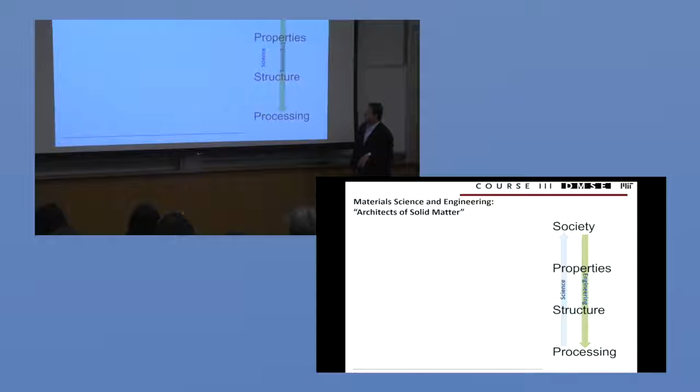All right, so material science and engineering is essentially everything that you just told me is exactly true. What we study in material science and engineering is how to build solid matter.

So here's the way I like to think about it. You all know what a mechanical engineer is, right? And if you think about what a mechanical engineer does, they take components like gears, sprockets, bolts, and they put those things together in novel ways and they make engineering products, right? They make engines and they make mechanical devices. You probably know what an electrical engineer is. They do the same thing. They take component pieces, resistors and transistors and inductors, and they put them together and they make electronics and electrical stuff. You can do this with every engineering discipline, and you kind of know what they are. You take components and you build stuff out of them.

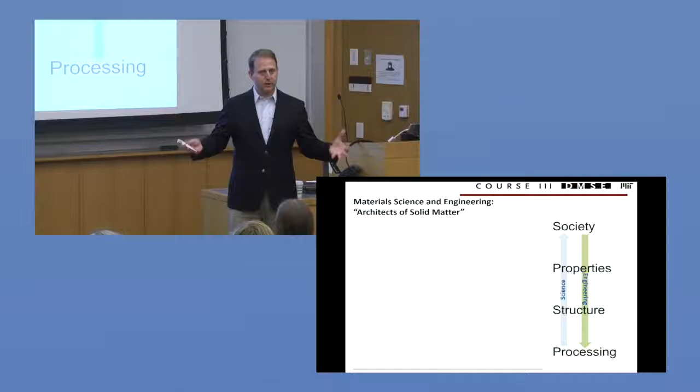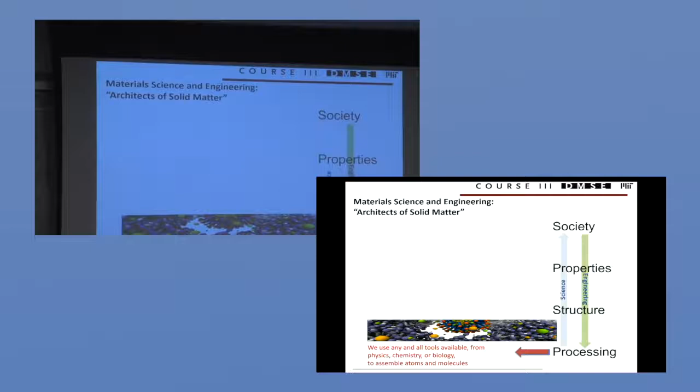Well, in material science and engineering, like I said, we are builders. We're building solid matter. And so when I say that we build, what are my components that I build out of? The answer is that the components are atoms and molecules. So in my field, we take atoms and molecules and we try to figure out the rules for how to put those guys together in unique and interesting ways in order to build solids. Now, there's an instant corollary of that.

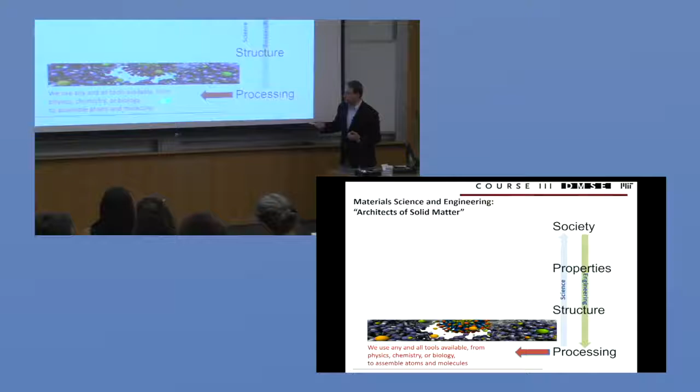How do you push around atoms and molecules? How do you build out of those? You don't pick them up and put them together. You have to really understand basic science, physics, chemistry, mechanics, and biology. Because to me, as a material scientist, these are tools in my kit from which I'm going to sculpt solid matter out of atoms.

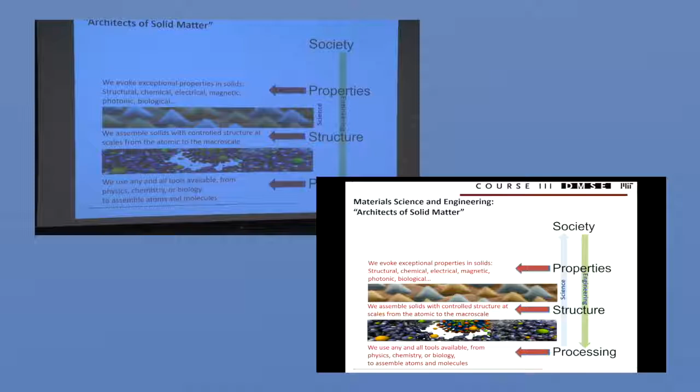Let's talk about structure. I'm going to push around atoms and make interesting and unusual patterns of atoms and molecules, and that's the structure of a material. If there's one word that's most critical to material science, it's structure. It's about getting all the atoms in the right place, because what I want to do is evoke fascinating structures that give rise to interesting properties. And if I can get interesting properties out of matter, I can make products, devices, and serve the needs of society.

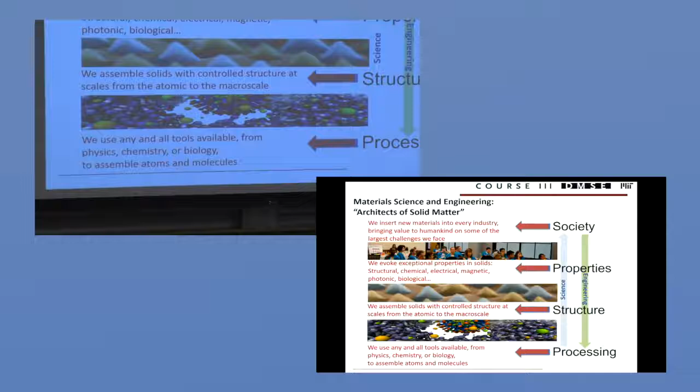So, are we an engineering discipline or a science? The answer is sort of both. We're the discipline that integrates across those. I take all the available tools of science, use them to engineer solid matter, and deliver products and devices to society. That vertical integration, 50% science, 50% engineering, is something we try to cultivate actively. We're trying very hard to do both of those things. And when we talk at the end about what that means for libraries, that's an important component. Do we look like an engineering department or a science one? Yes, we look like both.

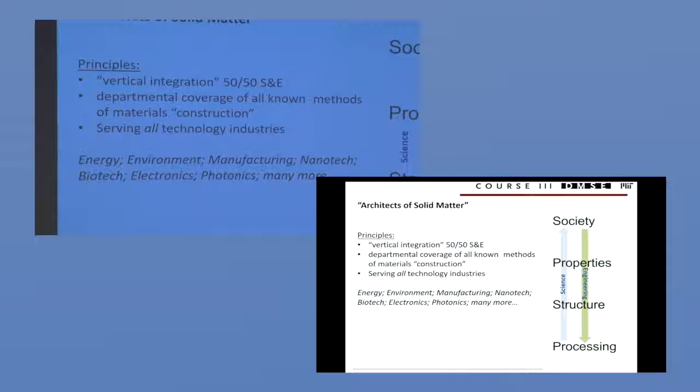I also like that my discipline is really agnostic or Catholic in terms of what we care about. We care about everything, everywhere we want to engineer a solid. Every single discipline touches ours. We serve every possible industry. I want my students to go out and become leaders in every industry, whether it's healthcare, biologically oriented, or metals and engine coatings and all of that. We do it all.

So I'm going to start with a little demonstration. I'm going to need a brave volunteer. Or a not brave volunteer. Okay, it's all yours, come on up. I'll pick you because you have the maximum number of people to disrupt to get up here to the front.

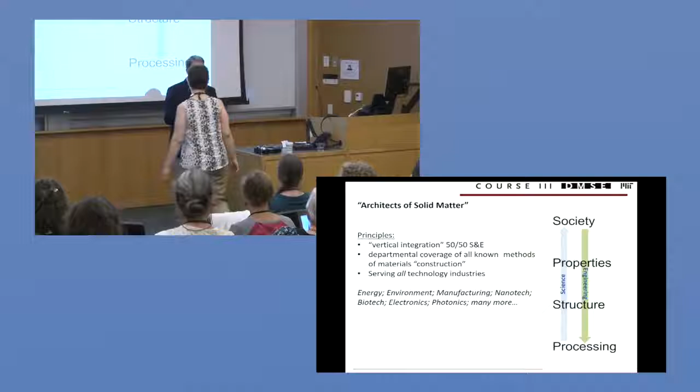I'm interested in taking ordinary materials, restructuring their insides, and endowing them with unusual and magic properties. This will be a little hard to see, but we'll pass it around when we're done. I'm holding two arches, these are wires of metal, both shaped in an arch. These two are actually almost the same exact chemistry. If you cut them open and measure how many atoms of each type there are, they're both mostly copper, they both have some aluminum, some nickel. They're pretty close in terms of composition. Their color's a little different, but compositionally they're almost the same. But the arrangement of the atoms is very different, and they have different properties. This is sort of like a conventional brass, like all kinds of metals you encounter every day.

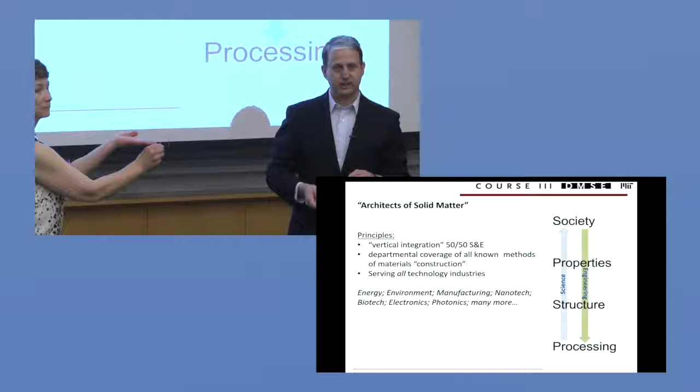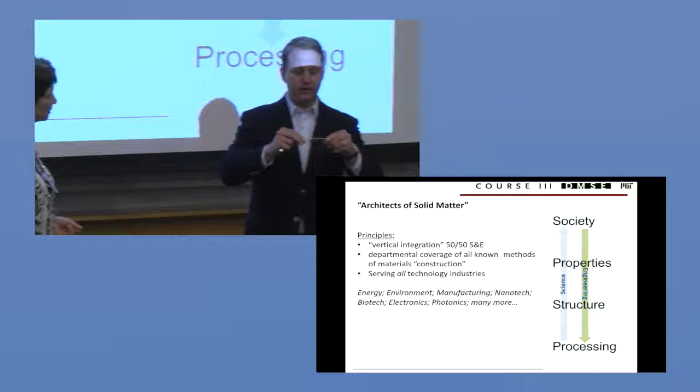And if she takes this arch and bends it, you know what's going to happen. Hold it up, bend it. What happens? It's deformed, right? Because I'm super strong, it bends. So it's not a surprise, metal bends. And by the way, when you deform a metal, you bend it a little bit and it's flexible, it just flexes a little. Now you're stretching all the bonds in the metal. That flexing is stretching all the bonds. When it deforms permanently from arch to flat wire, that's because you're rearranging all the bonds. There's all kinds of stuff going on in there where bonds are breaking and reforming in order to change the shape.

All right, now here is a specimen that we made at MIT. Hold that up and bend that puppy. Straighten it? Yep, straighten it out. Oh, no. Straighten it out, okay. All right, now torture it. Wrap it around your finger. Oops. Okay.

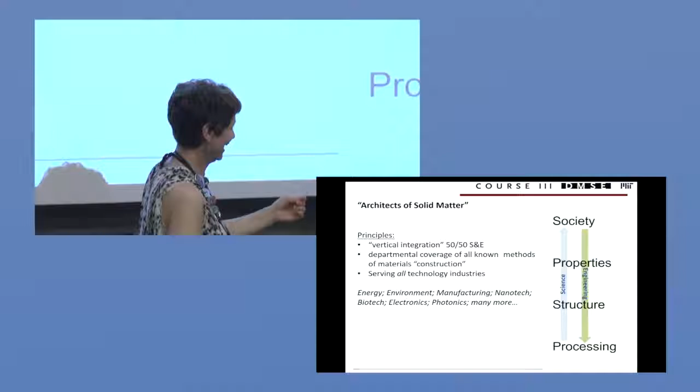We'll pass this around. I don't think you can put a kink in this thing—it's undeformable. That's amazing. And it feels different too, right? I'm going to pass this around, you're going to feel it. One will be familiar, one will be not familiar.

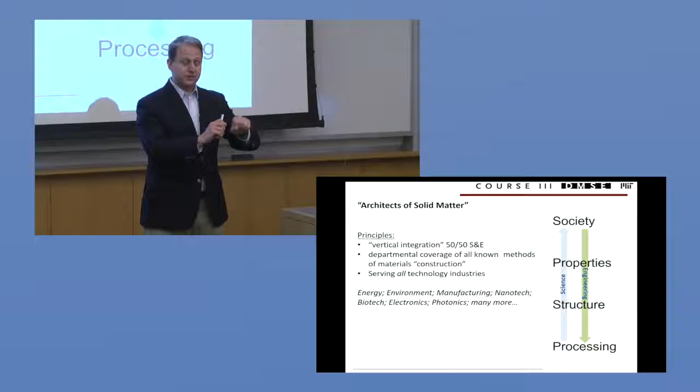We call that a super elastic metal, and it's super elastic because it's been designed so the atoms are arranged in a certain way. When you start deforming it, at first the same thing happens in both wires: you stretch the bonds a little bit. But at the point where the first one starts to break bonds and rearrange, the second one undergoes a coordinated shuffle—all the atoms move together in a military-type fashion. Then when you let go, they shuffle back; they're designed to do that. So you get 10 times more elastic deflection out of it.

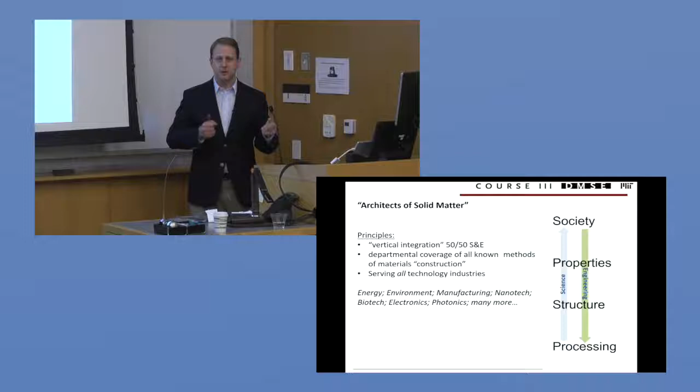You take a normal metal and turn it into a super elastic metal, and I'll let you imagine what we can do with that—the imagination runs wild. That's an example of what I want to do: study the structure of matter, use every tool in the toolkit of science, physics, chemistry, and biology to push around those atoms and get magic properties to pop out.

In my department, I want to do that with every kind of material, covering an entire spectrum. I want to work at the level of atoms and theory, simulate and solve quantum equations, use electron microscopes—all that science nerd stuff. But in the end, it's about making products that improve people's lives. It's an engineering discipline.

The other axis is the full spectrum of materials that surround us every day. They range from very soft things, such as fabrics, polymers, and even biomaterials. We are a material, are we not? This is solid. We want to be able to engineer at that soft end of the scale, which interfaces with biology and medicine.

We also want to work in the middle—EPM, I apologize for the acronym: electronic, photonic, magnetic. This is the stuff of circuits and smart materials that compute and do work for us; we want to put every atom in the right place to make them do functional things. And at the very stiff end of the scale, structural materials—I want to make rocket engines, planes, buildings, all of that.

So now I'm going to go into show and tell mode. I'll give you a few examples, all from my department at MIT. As department head, I actively try to cover this space by hiring faculty to make sure we do a little bit of everything. I'm going to start on the soft end of the spectrum—let's start with biology.

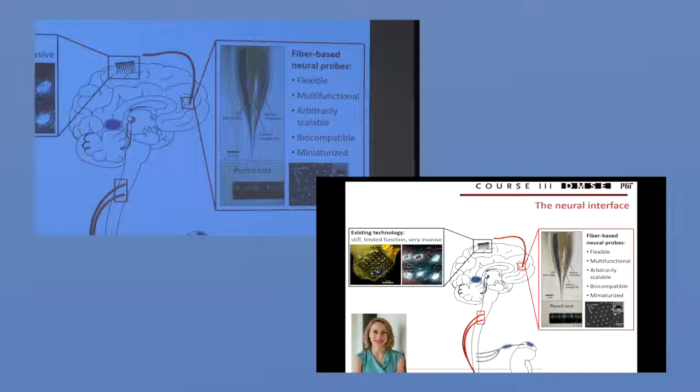First, she wants the probes to be very flexible. The brain is very soft, essentially the modulus of Jell-O. Putting something rigid in there, like a steel nail, and shaking it a little—it's not pretty. But a flexible polymeric fiber can go along for the ride on the jiggles without causing as much damage.

So she wants to make probes that are extremely flexible, made out of plastic or polymer. They have to be biocompatible—not just biocompatible, but compatible with the brain environment, which is unusual. And simply putting a piece of polymer into the brain doesn't do much; what you really want is to interface with the function of the brain.

She tries to make fibers where, if you zoom into the nanoscale, they have a whole bunch of features, such as electrically conducting electrodes—metal wires. In some cases, she puts in holes so you can inject medicine down the center of the fiber into the brain. In other cases, she wants to shine light into the brain to optically trigger neurons to fire. So I'm going to pass around this piece of show and tell.

Polina has done amazing things making fibers, and this is a sample of seven of them. Each is circular in cross-section, about 100 to 200 microns in diameter—not much bigger than a human hair. You'll get to feel these; they're all very flexible, so you can wrap them around your finger. Each has internal structure down to the micron and nanoscale, and the cross-section pictures show all different kinds of geometries.

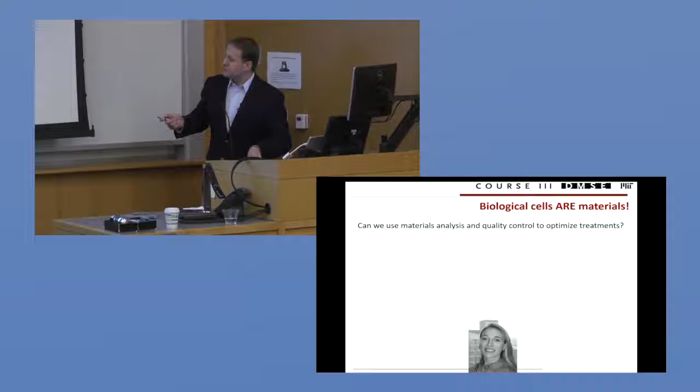This is my colleague, Professor Van Vliet, and let me tell you what she's been doing. So here's a rat. This is an unlucky rat. This rat has been irradiated, okay? And far from coming out with superpowers, this rat is dead. So this rat has been irradiated, and it has killed off its bone marrow.

Now, if you wanted to regrow bone marrow, if you wanted to treat someone who's been irradiated and help them regrow something like bone marrow, how would you do that? Well, you might use so-called stem cells. Stem cells are these magic cells where you could harvest them from a healthy rat, and you could multiply them and grow them. You could think about injecting those in there, and they would regrow something like bone marrow.

Very interesting idea, but here's the problem. When you go and harvest a bunch of cells, those are all different from one another, and only some of them have the magic power to sort of regrow into bone marrow. So there's this problem of quality control. We've got all kinds of little polymer balls, which we call cells. Some of them are the ones we really want, which could treat this mouse and maybe save its life, and some of them are not.

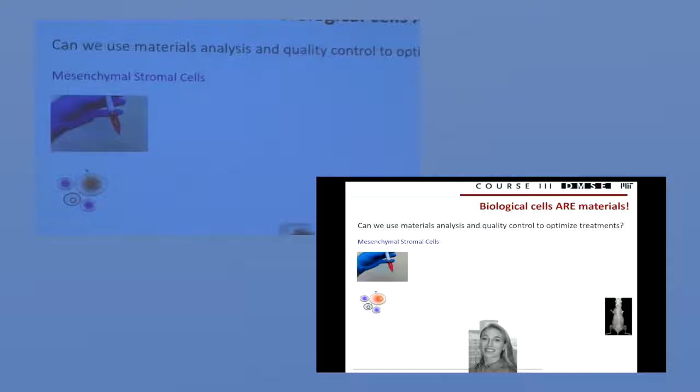And so now, what can we do here? What Professor Van Vliet has been working on is taking all the tools of materials analysis and quality control and applying those to stem cells.

Incidentally, here's what happens if you try to inject stem cells into this rat. I apologize for the cluttered graphic, but here's how you read this graphic. What you've got here is the number of days after you irradiate the mouse, and if you don't do anything to this guy, you take a whole bunch of mice, say 100 of them, and now you wait. If you irradiate them, you watch as they all die within 2 weeks. So that's what this is - they're alive, now they're dead.

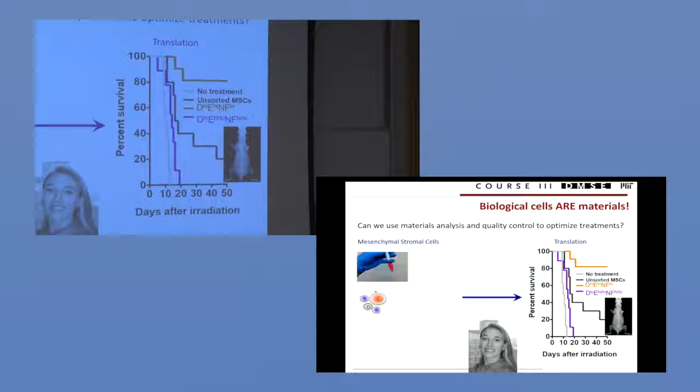Now, if you just take a bunch of stem cells or a bunch of cells that you've harvested and you hope that it's going to regrow marrow, you can inject those in there, and you hope it does something, and it kind of does, but the bad news is that they start dying at about the same point. They just kind of die more slowly, and it really doesn't take. So if we really want to make treatments out of this stuff, we've got to actually figure out which of these are working and which are not. We have to, in short, go in and treat these like a materials production facility and do quality control.

So Professor Van Vliet does things like this. She makes little devices that are designed to sort and measure cells. This one is sort of an inertial sorting device where she pumps fluid through this spiral channel, and she gets these cells moving, so when they shoot out this end, the heavy ones go over here and the light ones go over here, and she can sort them by size.

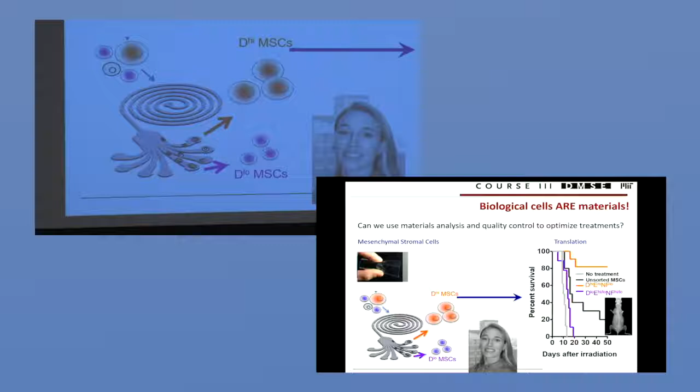And then once she pulls them out by size, then she starts testing them like a material scientist would. She uses a little nano indenter, and she squishes these guys, and she figures out what is their elastic property. Like, how big are they? How elastic are they? And actually, their size, their elasticity, how much they fluctuate. She goes in and she measures these like she's on a production line, and she identifies the ones that work and the ones that don't work.

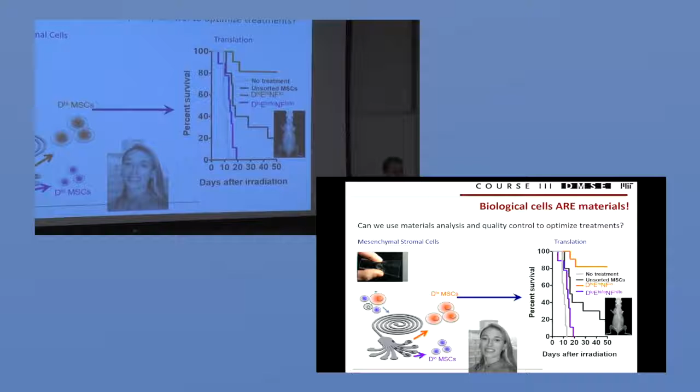And this is the result of that. If you end up picking the wrong ones, then mice die really fast. But if you're smart and you identify the ones that work and you use methods of sorting, then she can keep these mice alive, and she can keep them alive indefinitely and regrow bone marrow. So this is how materials science, treating biology like it's a material, is going to lead to new treatments and hopefully help us all.

So those are two examples from the soft end of the spectrum. Now I'll show you a couple examples from the middle of the spectrum, where we talk about functional materials, electronic, photonic, magnetic. All right, here's a quiz. What's this?

What's this thing? Does anyone recognize that? It's a vacuum tube, exactly. You don't look nearly the age to recognize a vacuum tube.

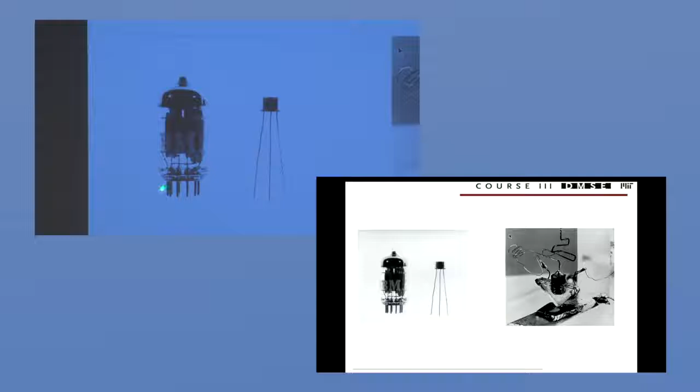This hasn't been a technology in a long time because we've replaced vacuum tubes with transistors, right? This is the defining triumph of material science and engineering. Big, clunky device, complicated to make. It's a switch, an electronic switch. And when they figured out how to make the first solid-state transistor, a revolution happened. We took a clunky, complicated system and turned it into a tiny piece of material.

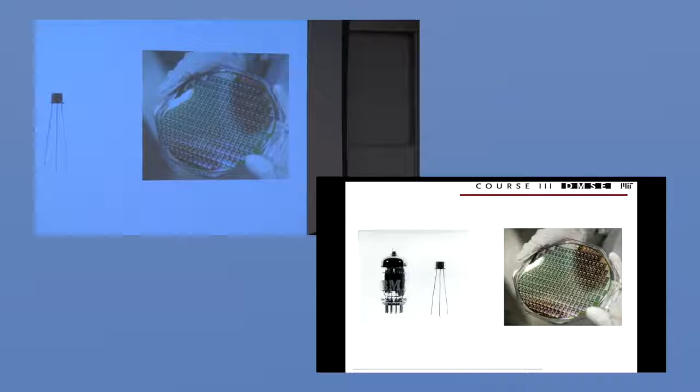And you know what's happened as a result of that, right? This is where the computer chip came from, and miniaturization came from. Now these chips are so pervasive, you probably have like 5 of them on your person right now. This is what has made computing pervasive, and it's all because we replaced a clunky system with a material innovation. Just look what that did to our world. Think of how powerful we are now because we have all this in our command.

Now, I want that story in your head because the next one I'm going to tell you hasn't happened yet, but you're going to see this kind of story play again and again as solid-state materials replace complicated systems. I'm going to tell you a story from another one of my faculty members. This is JJ Hu, and JJ is about to effect this same revolution that you just saw in computing. He's about to do that in the sensing of chemicals, okay?

So think of all the places we'd like to measure chemistry. Wouldn't you like to know the air quality in here right now? Wouldn't you like to know if the drinking water is safe in Mexico? There's a million places where you'd love to have chemical information. How do we measure that stuff now? Well, you take samples, you send them to a lab, and you measure them in some large system.

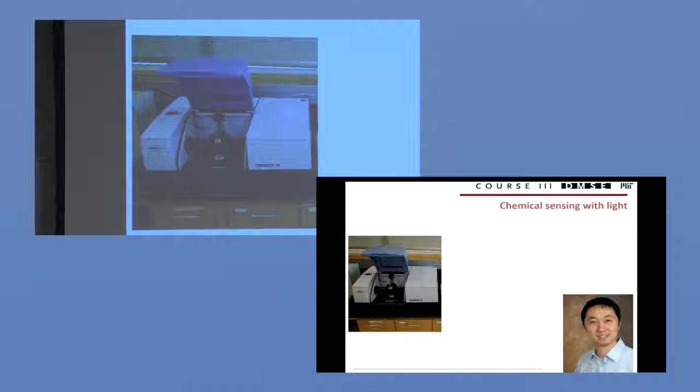So here's an example: this is an infrared measurement system. If you work with chemistry departments, this is bread and butter. To analyze a sample, you take it, put it in this machine, close the lid—it's as big as a bread box—and you get data out of it, one sample at a time. Just imagine what would happen if, again, think of that vacuum tube. This is to a vacuum tube as transistor is to whatever JJ is doing.

So that's what JJ, in fact, has done. Just in the past year or so, JJ came up with the following material solution to this problem. He made films of material that are very carefully chosen, and it starts with silicon. So he sort of starts with the same wafer on which we make computer chips. He has to grow a ceramic layer—this is a semiconductor insulating ceramic layer.

On top of it, this is a complicated ceramic glass—this is a glass layer, and this is a different glass layer here. He works with the same types of devices they use to make computer chips, but what he did here is he made lines on top of a chip, and these lines can guide light. This machine shoots light through the sample and measures the way all that light refracts and interacts with the sample. What JJ did is he figured out how to put it on a chip.

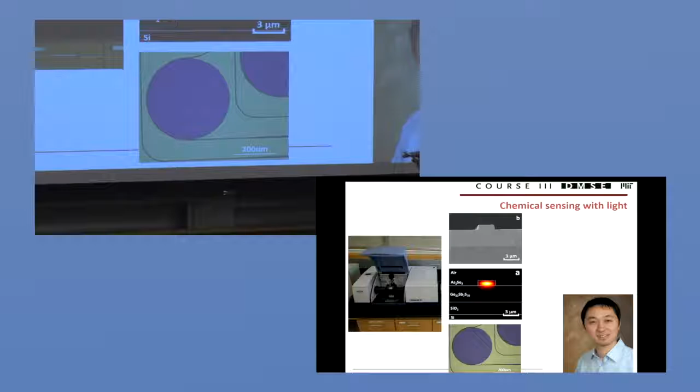And what you're looking at down here, this is the transistor moment for chemical sensing. Because what you're looking at here, these are racetracks for light—they're called waveguides. So on a chip, he can now shoot light in on this side, and it will follow this curve. So instead of having to shoot it through space and through a vial for chemical sensing, he can shoot it around on a chip. The scale here is 200 micron—again, that's the same size as those fibers. Teeny tiny little things, barely visible.

And he can actually build little pads on top of there, and now any chemical that touches this pad interacts with that light in the same way it would have over here. The amazing thing he's done is he's shown that on a chip, he can reproduce what this bread box does, right? And so here it is.

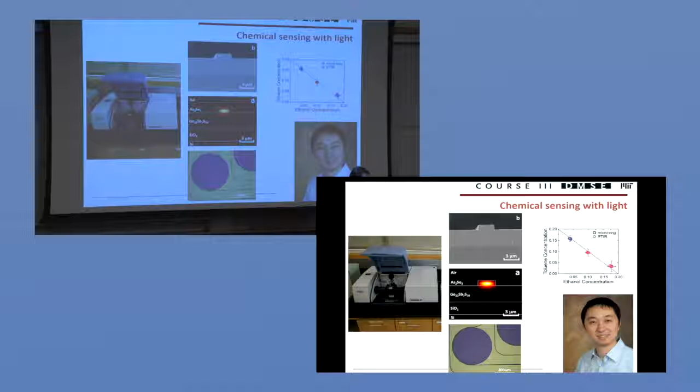He's able to measure—here he's showing that in a beaker, he can measure both the amount of toluene and the amount of ethanol. His data points here are right on top of the data points you get out of this machine. The difference is that this is so small you cannot see it, and it's on a chip. Just like all the computer chips, we can use the tools JJ's come up with, and we can make thousands of them on one chip.

In the same way that the first transistor led to all the phones and computers and all the ubiquitous computing we do, I want you to think about what the world looks like in a few years when, with a wafer like this with photonics integrated on it, we're going to have sensors everywhere. What happens when chemical sensors are everywhere and we know everything about the environment around us, our air quality, and we don't need a smoke detector anymore? Your phone will know. So think about that.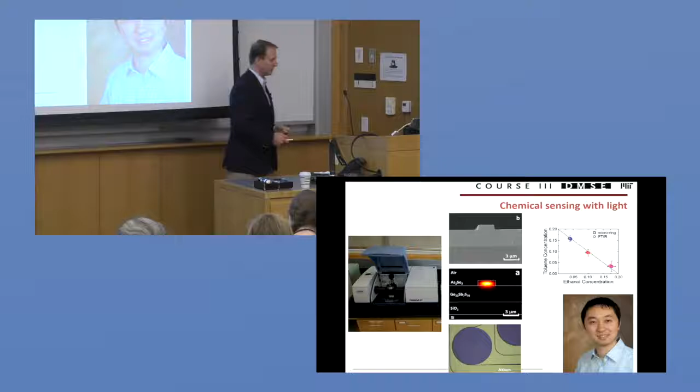Wherever, from vacuum tube to solid state, that analogy is what material science does. We're going to do that in chemical sensing, and we're going to do that in other domains as well. How about magnets? I'd like to talk about magnets.

This is Professor Jeff Beach. He's in my department, and he is very interested in magnets. I'm going to show you a little trick that Jeff has pulled in the past few years. What you're looking at here is a tiny little piece of a magnet. Again, notice the scale bar here: this is 200 microns, 250 microns, similar size to those fibers I've been passing around. So on the cross-section of those fibers, you're looking at a magnet here, okay?

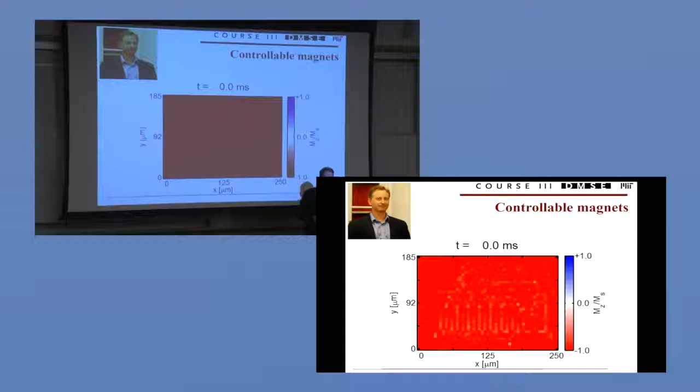What Jeff has done is he's made this magnet in a film. It's a thin film, a little square film of magnet. He has wired it up with electrodes, and what he has discovered is a way that he can control the magnetism in this film. I'm going to show you this movie now.

What you're looking at here in red, this is the magnetism. In a magnet there are two poles, right? So this is like the North Pole, or let's call this the South Pole - it's on the bottom, South Pole, North Pole. This magnet, all the poles are aligned, right? It's a single magnet. You're looking at the South Pole of this magnet.

Now watch what happens when we run his movie. He's figured out that on this film, once he applies voltage to it, this solid sheet of magnet - when he turns on the voltage, look what he can do to it. He can flip the polarity of this magnet by pressing a button on his computer. He can sort of turn the magnetism on and off.

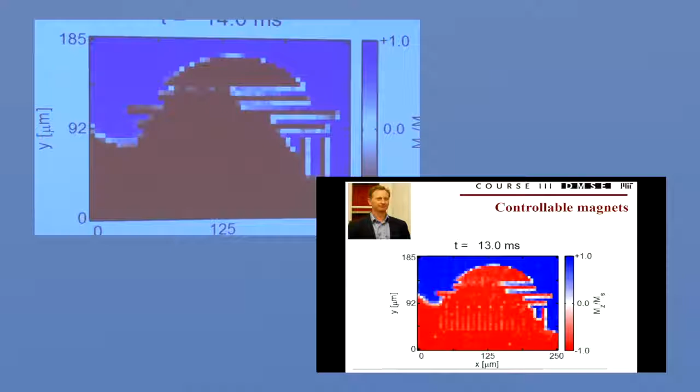Not only can he turn it on and off, he can pattern it - he can make a magnet pattern its magnetism. That's the MIT dome, if you don't recognize it. So he can tell a magnet where it's going to be north and where it's going to be south. In short, he can pipe spin around - we call it magnetic spin, right? Spin up, spin down. Oh, now he's getting cocky - he can turn it on and off really fast.

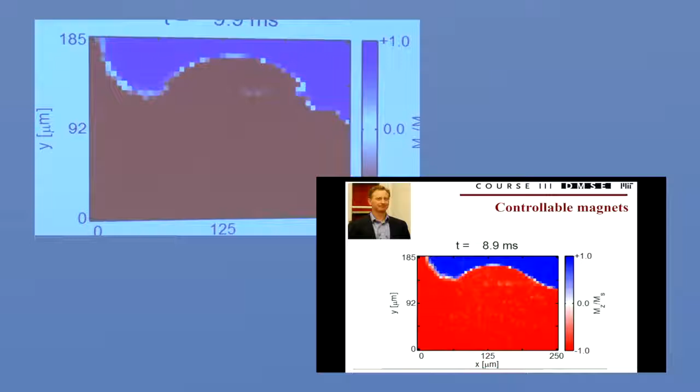Okay, anyway, here's what I want you to think about. Imagine a computer where, in a circuit, we run electricity through all these lines and switches. Imagine now, instead of running electricity through lines, we don't have to run anything physical - we just pipe the magnetic spin around. That's what we call spintronics. Have you heard the term spintronics? Spintronics is like what's after electronics.

When you make a computer chip and run a bunch of electricity through it, what happens? If you turn on your computer and run electricity through it for a while, it gets hot - because all those electrons have resistance, they flow through there and heat up, and we have to get all that heat out. In this case, he's moving around the spin but not moving around the electrons - he's just moving around the magnetism inside the sample, and he can drive it all with voltage. So it's very fast, very efficient, and doesn't create a bunch of heat. Spintronics is what replaces electronics, and this is the kind of thing Jeff is working on.

So that's material science. You can see what we do, right? All the atoms in all the right places, manipulate the properties, do amazing things.

Let's talk about functional, structural, those kinds of things. Fun fact: if you make 1 kilogram of steel, how do we make steel? Does anyone know? Where does steel come from?

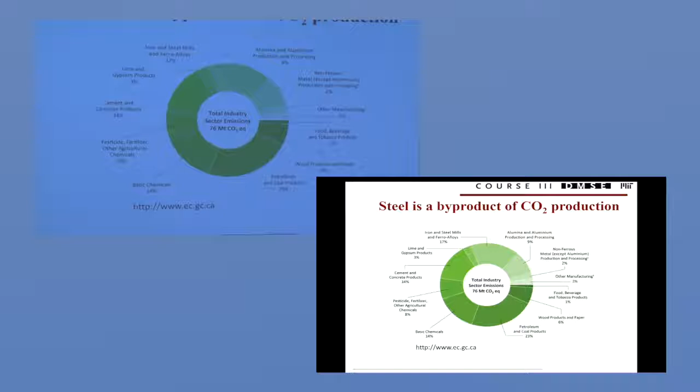Steel is mostly iron. Where do we get iron from? We get it from the ground, from ore. Ore is rocks, not metal. In the case of iron, it's iron oxide—basically rust. So you dig up rocks and they contain iron oxide.

It's oxidized iron, and the way we get iron is by deoxidizing it—getting all the oxygen out of the rock. We do that by reacting it with carbon, using coking coal. Coal plus iron ore, mixed together, produces steel. Yes, a little bit of steel, but what else do you produce?

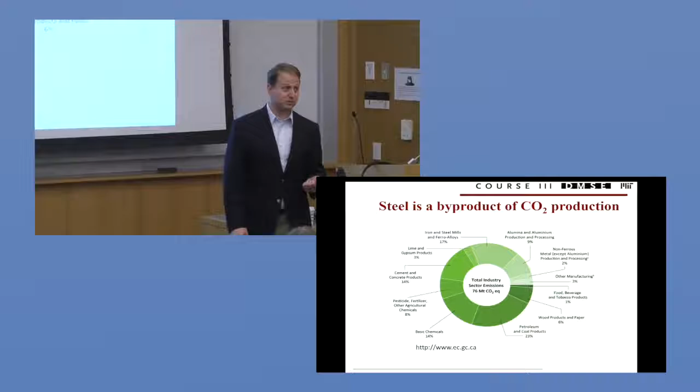For every kilogram of steel one makes, one ends up making about 2 kilograms of CO2. So a steel factory is really a CO2 factory, and steel is the byproduct. If we care about the environment and CO2 emissions, the way we make materials has a huge impact.

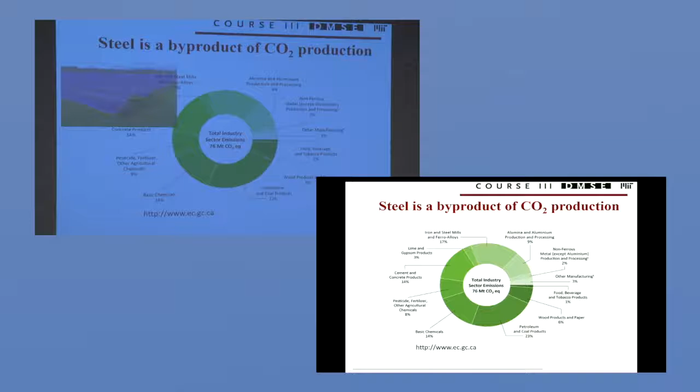Iron is a huge segment of CO2 emissions, and the other metals are not much better. To get metal out of rock, we put a lot of carbon dioxide into the air. That's a big challenge for material science. Other environmental issues are also critically important in material science.

Solar cells—what are those made of? Silicon. That's also material science. Those chips we passed around are the same basic material in a different form. The only way we're going to get new energy sources is by having materials that can harvest energy for us.

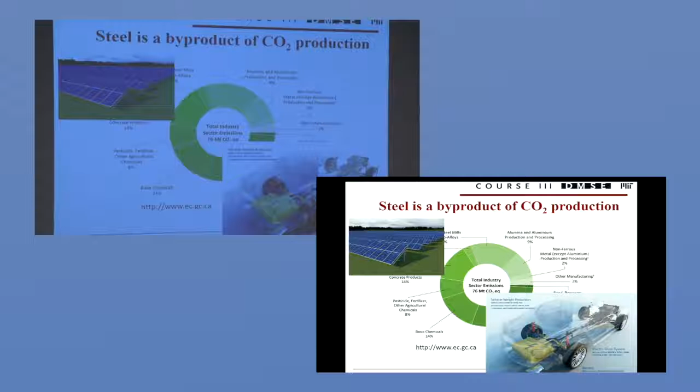Transportation, batteries—a huge fraction of my department studies the material science of batteries, because a battery is a complicated system of parts that all talk to each other. Many are solid, they interact with liquids, it's highly corrosive, and so on. That's a huge area for us.

The other thing is the shell of this vehicle—traditionally steel. Whenever we're driving around or transporting things, we're moving a whole lot of heavy weight, which decreases energy efficiency. In the future we have to reduce that weight, so we spend a lot of time trying to lightweight materials and make them stronger.

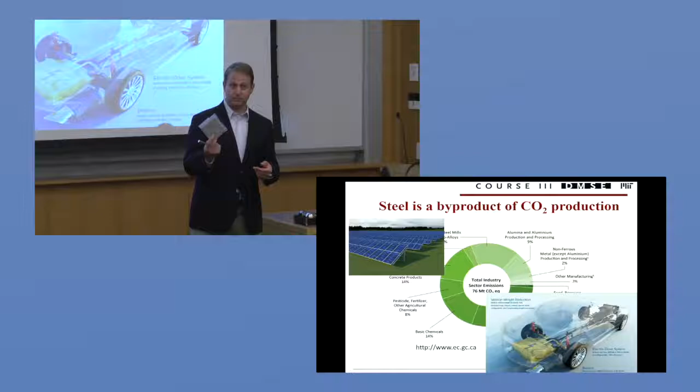Here's another show and tell piece—I've got a couple on lightweighting, which is very big business for material science. This thing I'll pass around is a material you know well and use all the time: aluminum. But this happens to be a foam made out of aluminum. It looks and feels like styrofoam, but it's aluminum, so it has the strength of aluminum with very low density.

As you add holes to the sheet and make it foamy, it gets lighter way faster than it gets weaker. So you take a ton of weight out per unit strength. This is a huge innovation for aerospace and transportation.

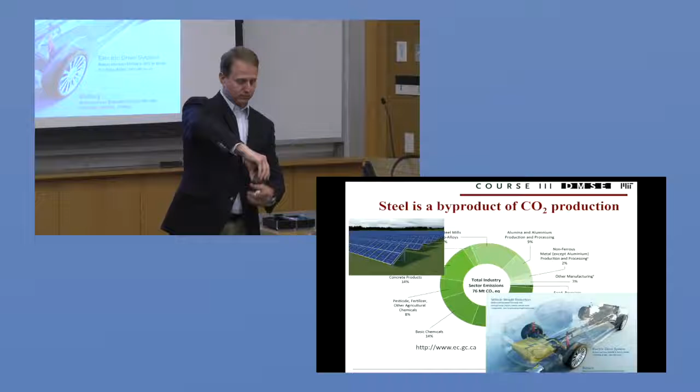I've got another one for you here too. Does anyone recognize this thing? It's a ball valve—sort of like a modern napkin ring, which we joke we research a lot in my department. You can imagine this embedded in a pipe, and you turn a handle and this thing turns, so there's an open and a closed position. This is emblematic of a million engineering components in systems everywhere.

On a rocket there's a ton of valves, in aircraft there's a ton of valves—this is usually a valve. It's a mechanical thing, because it's going to wear: it sits in the pipe and we turn it, so we worry about wear and good seating. It also needs to carry fluid, so we worry about rust and corrosion. This is a very typical valve, made of stainless steel, and the stainless means we're adding corrosion resistance.

Here, hold that for me. How much does this weigh, Eugenia? Is that a pound or two? All right, so here is the MIT answer to that thing—this has the same strength as this one.

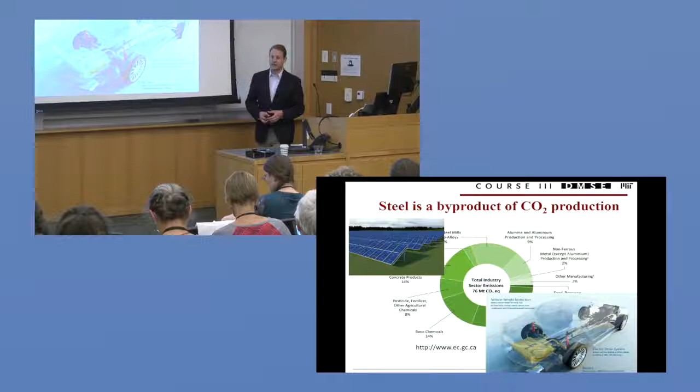So the cars would be still as safe, but way less heavy. Exactly right. If we take the weight of a car down by a third without making things weaker, then safety remains constant, but energy savings goes through the roof. So the way we solve our energy problems, the way we solve our environmental problems, is with material science. And that's the message here on the final piece.

Another thing I'll mention, this is Professor Elsa Olivetti in my department, and what does she study? Recycling. It's not junk anymore, right? It's now an input material. So what Professor Olivetti does is she takes the field of industrial ecology and she marries it with materials science. She is, I think, one of the world's first materials industrial ecologists.

What she basically does is she studies the end of life of all of the products that we make out of all different kinds of materials. And she says, all right, how do we dig stuff out of the ground, now we make it into something, we use it, and then we throw it away. How do I close that loop? How do we close that loop so that instead of throwing things away, we're using more of it? And at every step in the process, how do we design to recycle? What she's particularly interested in is, in the first place, before we design something, let's design it with recycling in mind.

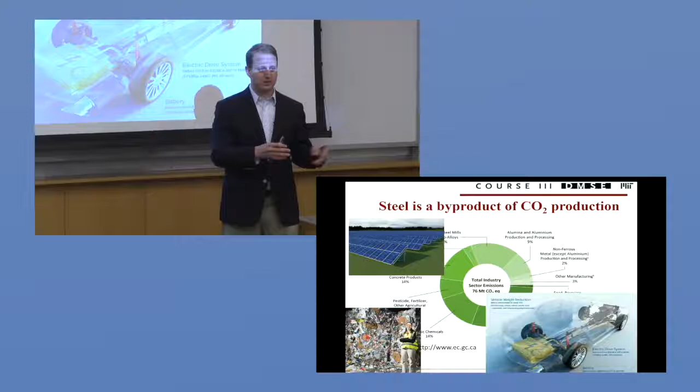So this is the way material science is going to address these kinds of problems. All right, we talked about iron and we talked about steel. I want to share with you what the future might look like if we do a good job on the material science. This is Professor Antoine Allanore. Antoine is famous for having worked—he's at MIT now, but before he came to MIT, he worked at ArcelorMittal, which is the world's largest steel company. And he built this happy fellow right here.

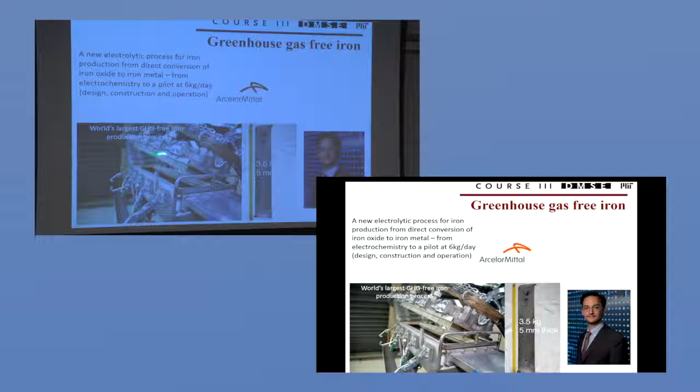What this thing is, it's the world's first reactor that takes iron ore, which, remember, is iron and oxygen together, iron oxide. He developed a new process where instead of putting coal into it and chemically reacting away the oxygen, you run electricity through it, and you actually bodily separate iron and oxygen. So the emissions from this thing are iron and oxygen. This is a steel production facility that, instead of putting out CO2, is literally CO2 free, and it puts out oxygen. And the way it works, it's almost magic.

I don't think I even understand it. But what you do is you take rocks of iron oxide and you crumble them up into little pieces. So you're looking here at a tiny little sand pebble of iron oxide. It's going to be orange, right? It's a rust flake. And this is a slurry. They figured out a chemistry where they can put all the rust flakes in there in these little particles. And when they start running current through this thing, they actually watch as these little particles convert. You can see here there's a transformation front going across this thing. On one side it's metal, and on the other side it's rust.

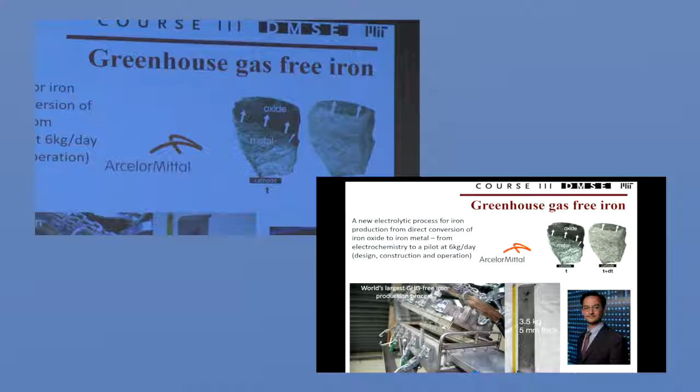So you just literally strip the oxygen out of this side, and eventually you convert the entire thing into a particle of iron, and the oxygen went off into the atmosphere. So that's amazing. Think blast furnace from the 40s, billowing smoke, belching CO2, and now think about a room temperature reactor spitting out oxygen and iron. This is what the future looks like when we do material science with the environment in mind.

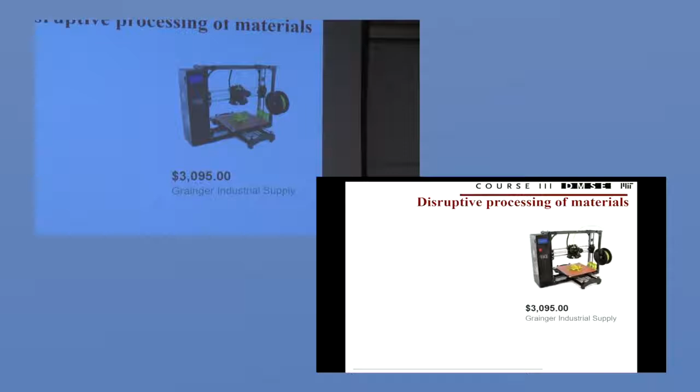All right, on the structural side here as well is manufacturing. How do we make things? Well, I bet you all know what this is. It's a 3D printer. We didn't know this 5 years ago, right? But now my library has one, right? And I didn't mean my school library, I meant my town library, right? There's children's books and a 3D printer. And all the kids know how to use this thing, right? These things are pervasive. And so the way we make plastic is changing, and it's changing rapidly.

And this is not happening just in the way we prototype and make little parts and baubles.

It's changing the way industry makes plastic parts as well. That is a story of material science, right? It's a change in the way we make material.

Let me tell you a personal story. This is my own story. I started noticing these things, my kids started noticing these things, and I saw that there was this big change in manufacturing coming in the way we make materials, 3D printing. And I said, all right, I'm a metallurgist, what I work with is metals. Why don't we print stuff out of metal?

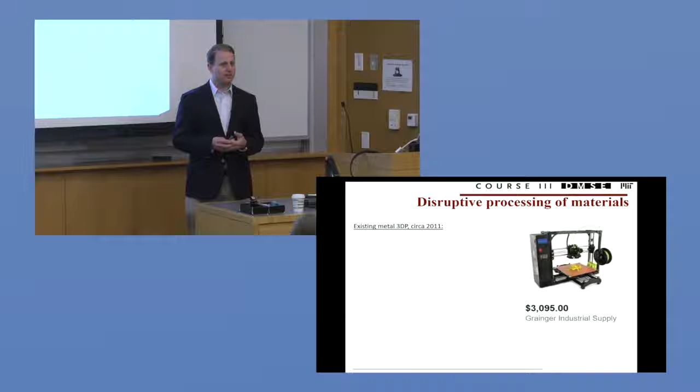Can we print in metal? And the answer is, yeah, you kind of can. I started thinking about this around 2011. And in 2011, let me tell you, it didn't look like this.

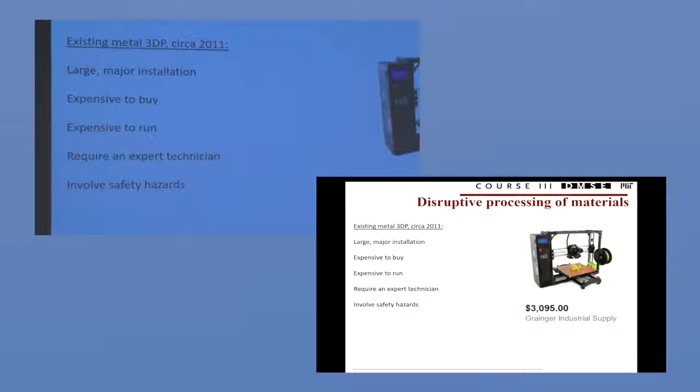It was not a $3,000 piece of equipment that you could buy and put in your local library. It was a major installation, from this wall to that wall, big piece of equipment involving lasers and electron beams, very expensive, very elaborate. It would have cost $1 million at that time to buy one. You need an expert to run it. A lot of safety hazards.

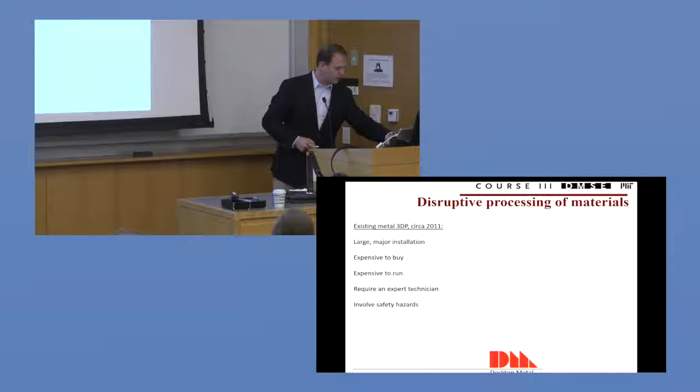In short, the way we make metal and the way we make plastic look pretty different. And so I started thinking about how could we do this differently. I worked with some collaborators, and we co-founded this company, Desktop Metal. And I want to show you where I think the future is in the 3D printing of metal parts.

So we came up with this little device here, which we call our Studio System Printer. What you're looking at is essentially a print head and this is the stage. This thing can come over and print a little part here. I'm going to show you a video of what that looks like.

Now, how do you print metal? Well, metal is pretty strong. You're not going to be just squeezing it, right? You don't squeeze metal like out of a test tube. You can't heat it up hot enough to do that. I'd have to have red heat if I wanted to squeeze metal here, and I don't want red heat in my local library. So I can't do that.

So what is a material science approach to do that? Well, what we came up with is we take metal powder and we mix it with plastic, we mix it with polymers. We end up with metal powder bound in a polymer carrier, and the whole thing is kind of like toothpaste now. And it prints just like the one at your local library.

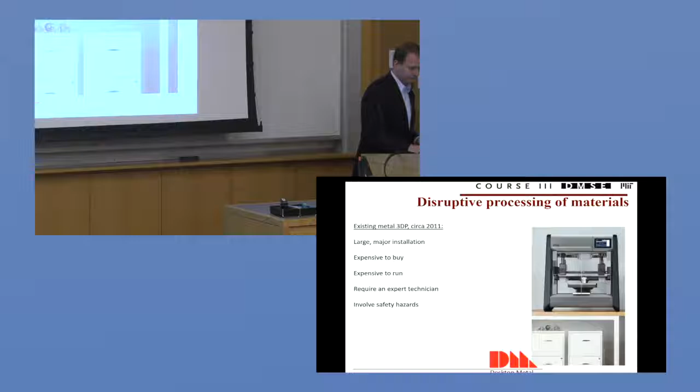Let me show you that. Let's hope this movie plays. So here's Joe Engineer, and he's using software, and he's designing a metal part. This is a hinge, I have one of these here, I'll show it to you in a minute. He wants to print this in stainless steel.

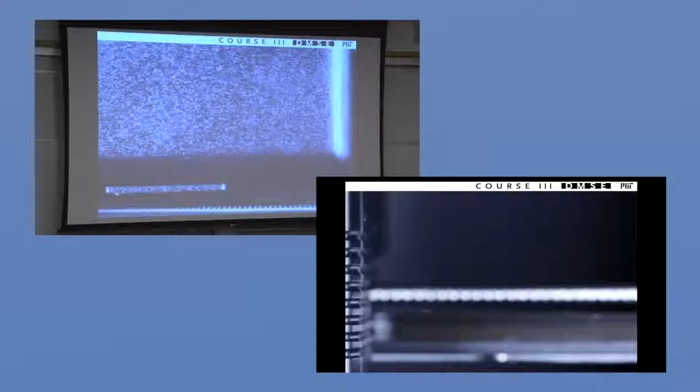Now what he's going to do is he's going to design this thing, send it over to that printer, and it's going to print very much like a 3D plastic printer. It's going to squirt out this bound metal, metal powder in a plastic. And so here it comes. It's moving, it's drawing, you can see it's drawing these layers.

But now it's not metal, it's metal in a plastic, right? Not good enough. So this is still a gooey plastic, but it's got a bunch of metal in it. So what is he going to do?

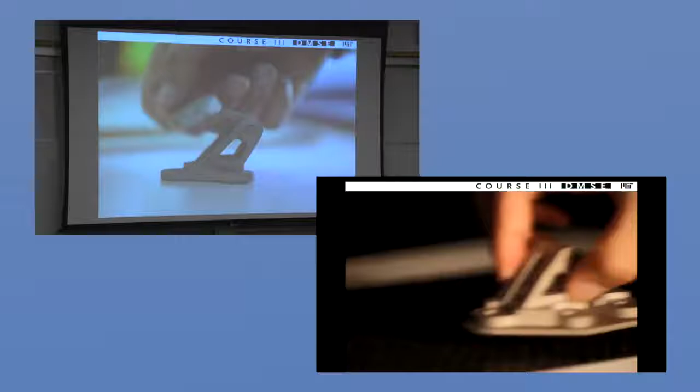Well, the way you get metal powder and turn it into solid metal is you fire it. So we have a furnace. After you print it, you put it into this furnace, which is a self-contained thing, and it fires it to high temperature. When you go to high temperature, you burn off all the plastic and polymer, and you recapture it. But the metal consolidates and shrinks, and you get a solid metal part.

So I'm going to pass this around. But I got to show you one other thing. So now we can print metal parts. This is coming.

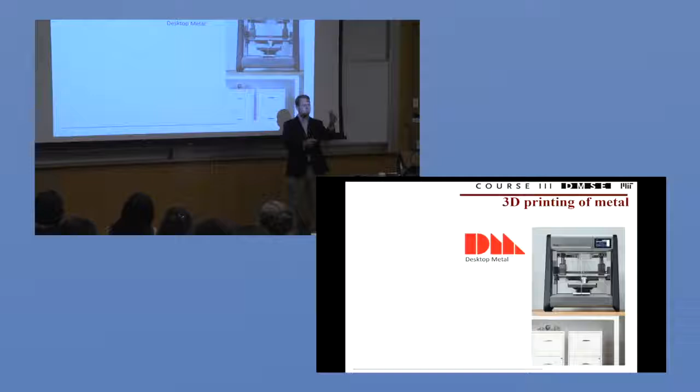I got one other little trick I want to show you. So here's this part, the part I want is that one that we just saw him with, I just want the hinge. But in order to get there, we printed a solid base, and we didn't want this thing to slump and deform when we put it in the kiln. So we drew in all these other supports and so on. So you kind of draw this thing with a bunch of extra stuff attached to it. And in the end, I don't want all that stuff.

I want to be able to detach this thing, right? So let's see if I'm smart enough to do it. I want it to come off, and I want all this stuff to sort of be recycled. What I really want is this part here. So the question we asked ourselves is, okay, how are we going to print all these supports? But I don't want to have to cut it and machine it or chemically etch it. I want this to be user-friendly so that my kid can do it. So how do we do that?

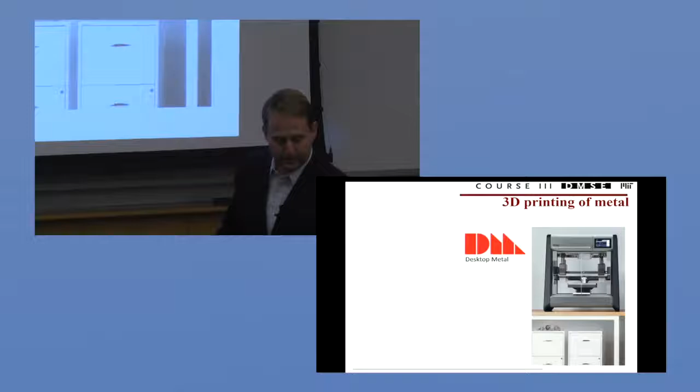I'll pass that around, by the way. And so what we came up with, and again this is a material science question, is how do I make something that I can fire and sinter and turn into a solid chunk of metal, but then I can detach it.

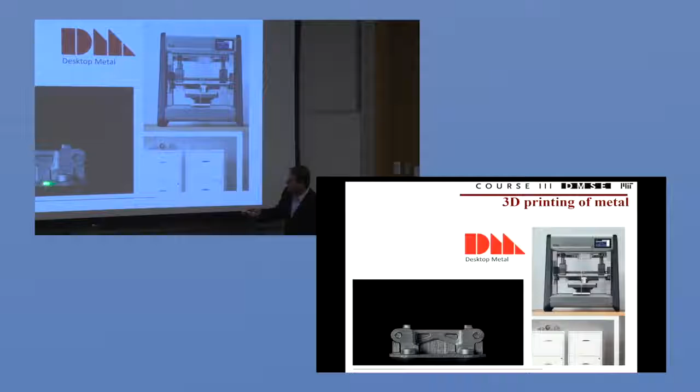What we came up with is not only do we have a head on here that prints out the metal, we have a second head that prints out a second material. Everywhere there's an interface, on this base and on all these supports and infill regions, wherever I want the metal to not be part of the structure, I use this second head and print a special interface layer, designed to do exactly the opposite of what the metal does.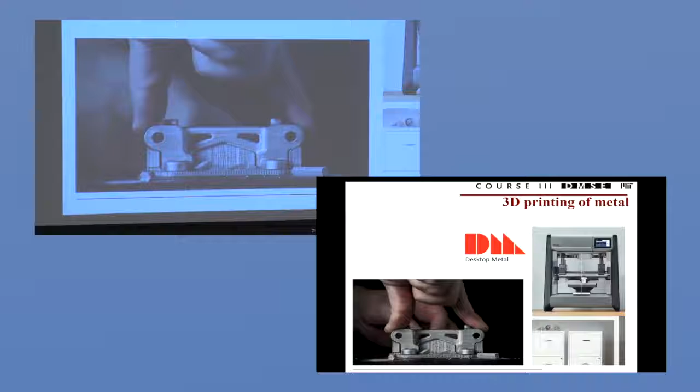Instead of consolidating and turning into solid metal, it actually turns into dust, into sand. So when you heat the thing up in the furnace, the metal consolidates, the interfaces turn into dust, and when it comes out of the furnace, Joe Engineer can come in here with his screwdriver and just pop out these things. So all the little infill regions, these are solid metal by the way, they did consolidate, but they detach from the part, and now he can just manually rip it off.

And that part that I'm passing around, you can see it's now detached from that part. So now you really can print a metal part, anything you can imagine. You draw it up in the computer, you print it, and you've got it in front of you.

So material science is about making materials. That piece of metal in your hand, that's just 316 stainless steel. That's a common stainless steel, but we're making it in a pretty different way. And so that, I think, can impact the industry.

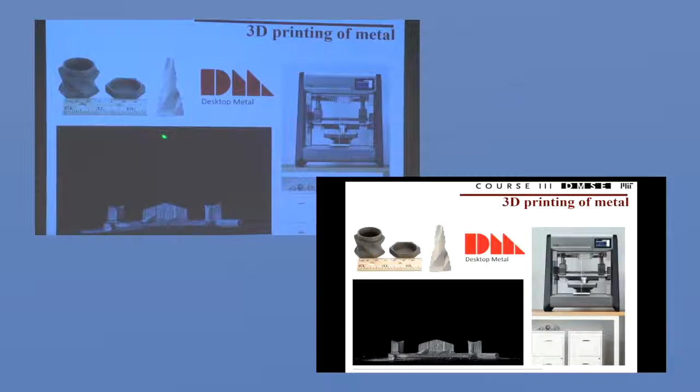In the future, I'm hoping that this kind of printing, you marry it with new materials. So I'm showing you here, this is actually a 3D printed part made of what I think is the strongest metal ever produced. This is an MIT alloy, based on the metal tungsten. And I don't know how many of you feel like you need a metal Carmex jar, but if you need a really strong metal Carmex jar, I guess we've got one for you.

There it is. But we might make things like tools and so on out of these extremely strong materials. So now not only is it a new way to make them, but it's actually a new material with improved properties as well.

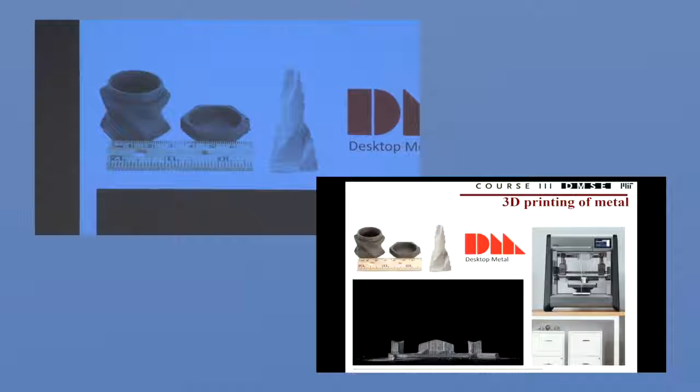All right, that is material science and engineering. So in every domain, from the very hard, structural, boring components like pipes and hinges and stuff, to active materials, electronics, magnetics, all the way to biology, you can see what we do in this field. We're trying to put all the atoms in exactly the right place and impact every possible industry.

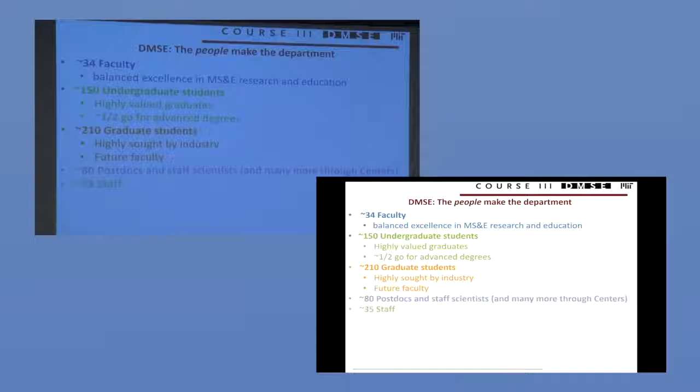I thought I would throw in just a few words here on curriculum, because I come from an academic department. And I care a lot about training the next generation of engineers and scientists who will go out and do this kind of work. In my department, there are roughly 400 or 500 people. We are mostly a graduate operation at MIT, but we have a strong contingent of undergraduates as well. And I told you at the beginning that I care a lot about balancing basic science and engineering, and I really do. If you go and look at what an engineering department looks like and what a science department looks like, they're pretty different, actually.

So an engineering department, for example chemical engineering or a school of engineering, will often produce students that go out into industry. Here we have postdocs and working - this is graduates who leave a materials science program or an engineering program. Two-thirds of them are going out directly into industry. The other third, apparently postdocs don't work. That's bad news, I got to go yell at them.

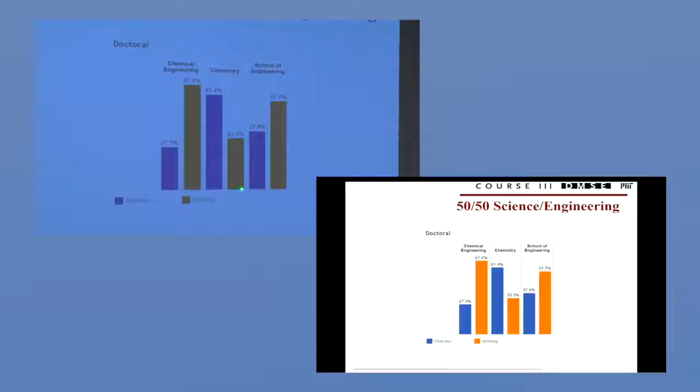So the graduates of our program in engineering mostly go to industry, and some of them stay in the academy. In science, it's sort of the opposite - we produce a lot of people for the academy, but not a lot for industry. That's the dichotomy between engineering and science.

What I try to do in my department, materials science and engineering, is care about both equally. We want to serve industry, we want to serve the academy. We're an equal blend of science and engineering. That's something unique about material science.

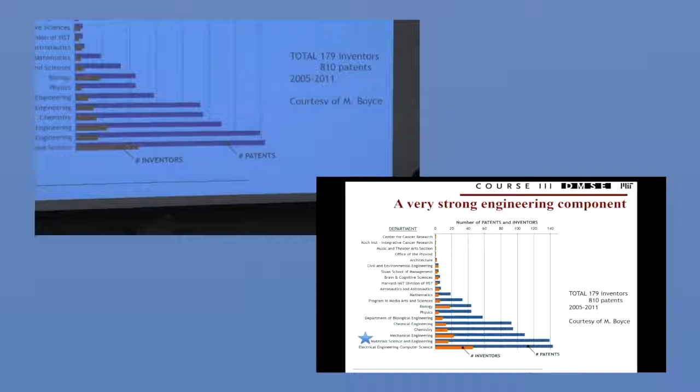I'll also mention this is an extremely innovative field. We make devices, we make products, we change the way industry works. If you look at all the different people who invent stuff at MIT, including, incidentally, our provost is on here - I've been meaning to go ask him about that. That's unusual, but I like it.

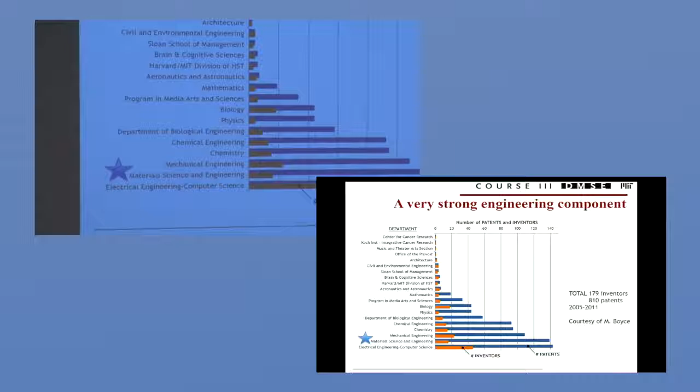Material science and engineering is one of the most innovative patent-producing, license-producing, startup-producing centers at MIT. This is a very innovative and entrepreneurial discipline. We're second only to electrical engineering and computer science, and not to brag, but that department is like 4 times our size - 120 faculty doing a nice job, and we're 35 faculty just killing it.

The other thing I'll mention is that materials science and engineering is central to every discipline. Someone mentioned that earlier when I asked what this field is. We take all sciences in as tools, but we connect to every possible type of engineering. We're very central, and at MIT this is explicitly true.

The number one priority on our campus right now: we're opening the doors on a brand new materials research building as we speak. This summer the building is being commissioned and opened, literally right at the heart of MIT next to our Great Dome. It's a $400 million investment in a research facility for materials research - a very important thing across our entire institute.

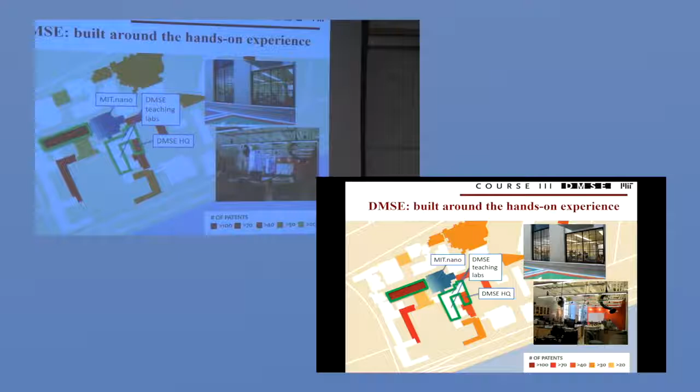One thing I want to say about the curriculum is that it's extremely laboratory-centric. I'm not sure this is normal all over the world, but at MIT, when you join a material science and engineering department, the first class you take is in the lab. Our entire footprint is built around highly visible laboratories, and the curriculum is lab-centric - when you take a lecture course, it's married to a lab course, reinforcing hands-on learning.

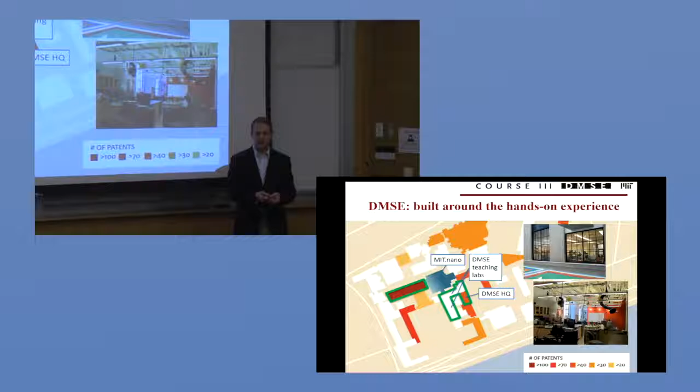All this stuff I'm passing around is because my field is tactile - we're very much about hands-on education, a high-touch curriculum. Students are in lab literally every semester they're in the department, from their first semester as sophomores until they're out. The final project in our department is a prototyping project where they work in teams to make a product that's a material solution to a market need.

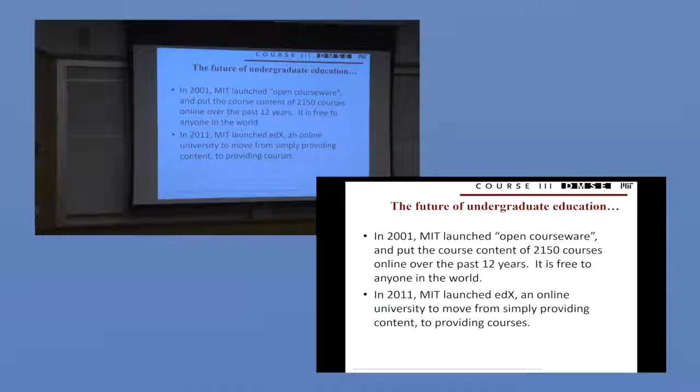One of the things I'm excited about in curriculum at MIT, which bears on your work as librarians, is that more textbooks are being replaced with flipped classrooms using online courses. Our department has plugged in heavily to MIT's online university, edX, launched in 2011. In the intervening 6 or 7 years, we've put an entire material science and engineering core curriculum online for free - a great tool for our own students.

We do a lot of flipped classroom work at MIT, where faculty put their course online with perfected, canned lectures, homework problems, and discussion forums. We let students absorb all that, then spend more time on Socratic discussion and laboratory work.

I think this is the future of education in my field. Increasingly, content delivery one-to-many, like we're doing right now, is going to be replaced by: watch the video first, now we do Socratic discussion and laboratory work. We're doing more and more of that as the years go by.

If you're interested in this, the largest materials science and engineering course in human history is 3.091x. We've taught this to over 100,000 students from around the world at this point. We've been running it for the past 5 years, and it's Introduction to Material Science and Engineering. Sign up for it, take it, enjoy it, it's free.

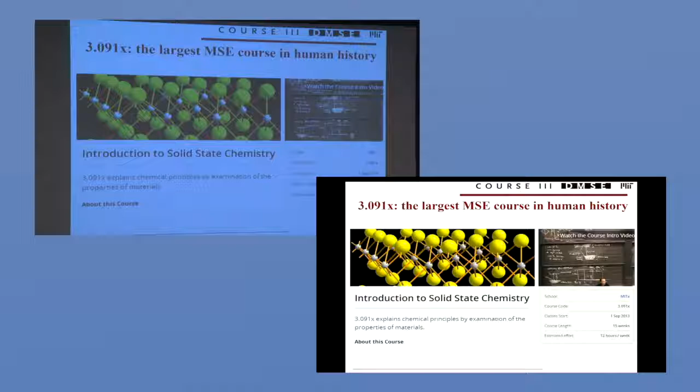We have a whole bunch of other courses: mechanical behavior, electronic materials, whatever you're interested in, we have the entire core on there. And again, I view this as the future of textbooks.

This is an interactive textbook. All the lectures on there, as you watch the lecture, you see the words appear on the right-hand side. It's searchable, so if a student missed a concept, they can search and find where that concept was talked about, and it's all indexed to the lecture. It's quite amazing.

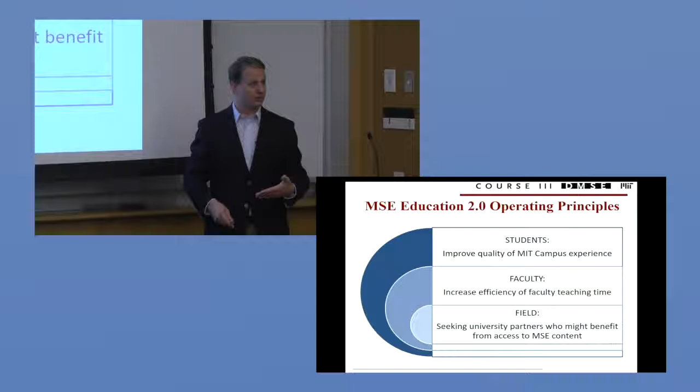At this moment, if you go back to where you guys work, if you're at a university, I am very interested right now in using this as a way to proliferate our field. I've put all these courses online to tell people what material science and engineering is. I'm trying to get the word out about what the field is. I'm looking for university partners who maybe don't have a material science and engineering department, or maybe they'd like to field a minor in material science and engineering but wouldn't have the bandwidth to do it. Well, I've got all these classes that are online and fully graded and validated, and I would love to work with people to find ways to inject that into curriculum elsewhere.

I was asked to talk for like 2 minutes about what I use at the library, so I'll just very quickly say that material science and engineering, we do use the library, it's very important to us. We have a material science librarian in our department, and part of it is that this is a field on the ragged edge of science. This is not just doing engineering work and making prototypes. No, we publish, we invent, we study atoms, we study molecules. This is a ragged edge scientific field. The primary archival journals are critical to the field.

I would also say that open access is something that we increasingly care about. One thing our library does for us, which I think is awesome, is that we have an open access policy at MIT where every article that we publish, MIT makes it free to the world. So the final typeset article is copyrighted by the journal, but the un-typeset article is made free by MIT to the world. And this is a huge thing for us.